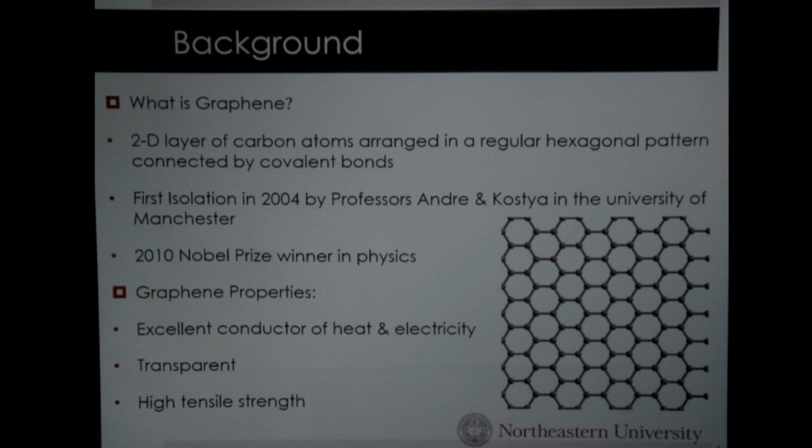Graphene has many unique properties. One of these is that it's an excellent conductor of heat and electricity. It is almost transparent, and it has the highest tensile strength of any material that exists today.

There are many ways to produce graphene. One of these ways is chemical vapor deposition, which we used in our process. Also, there's exfoliation and hydrothermal self-assembly.

Graphene has attracted many industries due to its broad applications, such as touch screens and transistors, conductive coatings and ink, and solar cells.

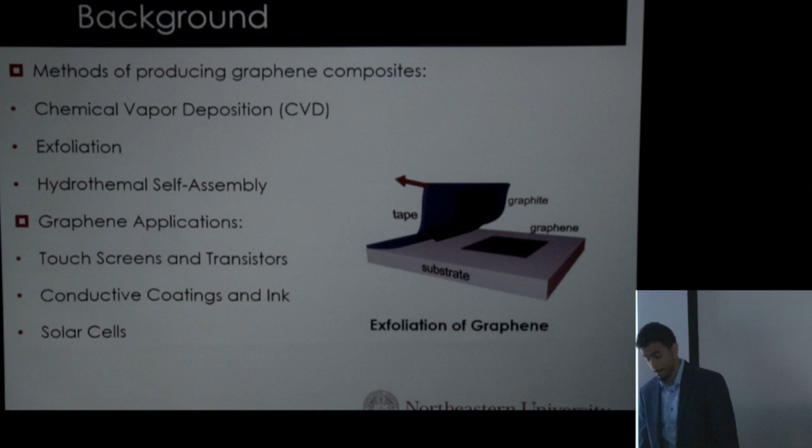For this project, we had three main objectives. Number one is to scale up graphene silicon dioxide composite using a novel continuous CVD process to produce touch screens. Number two is to make graphene more accessible for commercial and industrial applications. And number three is to lower the cost of producing graphene while maintaining the high quality of the graphene layer.

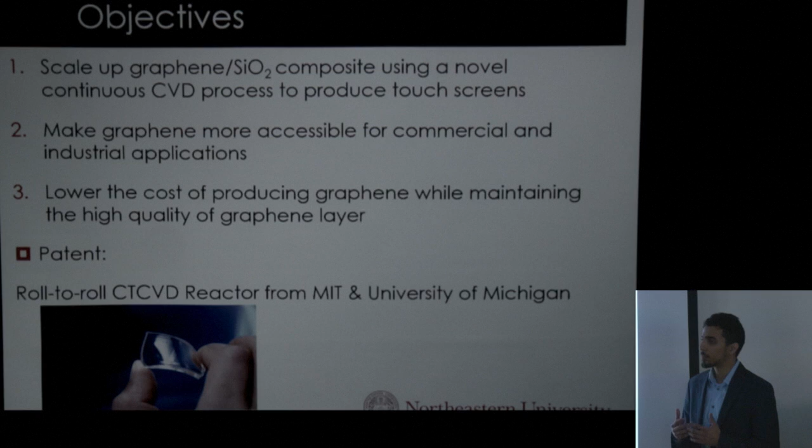In order to achieve our goals, we used a roll-to-roll concentric tube CVD reactor, a patent that was developed by researchers from MIT and University of Michigan.

The graphene market is projected to reach 149.1 million in 2020 with a 44% annual growth rate, as there is a new kind of demand for graphene every day.

The global transparent conductive screen market is expecting huge demand, with key providers such as Samsung, 3M, and Corning heading toward more graphene-based touchscreen technology.

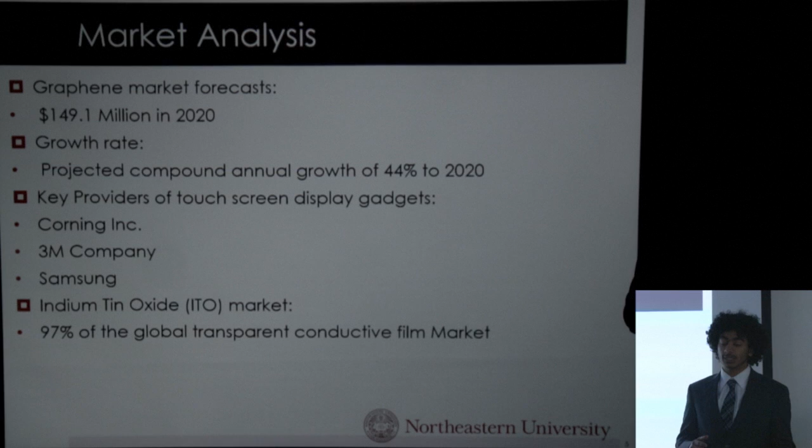Indeed, indium tin oxide holds 97% of the global transparent film market, and graphene is proven to be superior to indium tin oxide in its conductive properties.

Samsung showed huge interest in graphene as they filed a number of graphene-related patents, and they need around 7.8 billion centimeters squared to equip only 30% of their annually produced 336 million devices.

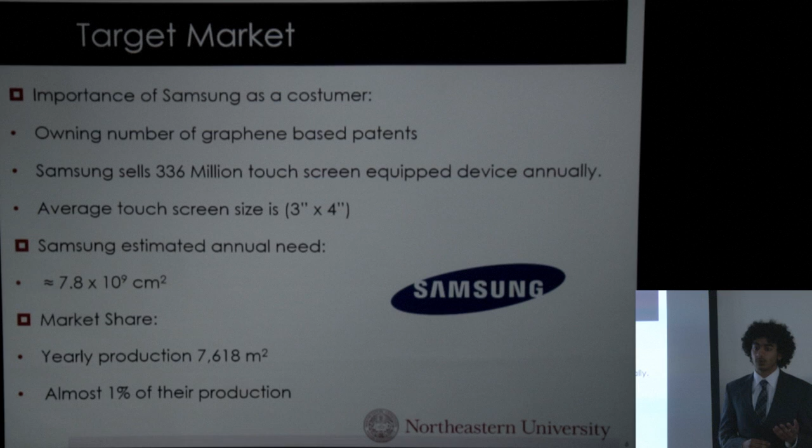We will be able to cover 1% of that through our production rate.

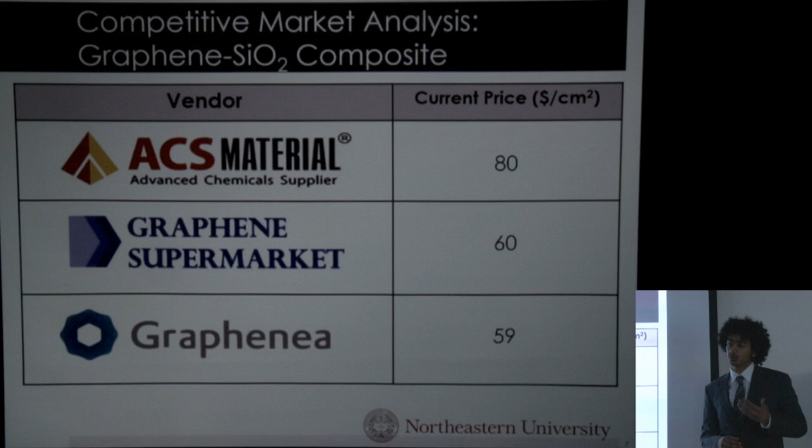It is also important to notice that current prices for graphene are around $60 to $80, as provided by Graphenea and other companies such as ACS Materials, and that's a lower product quality than the one produced by our process. Our price was around $0.2 per centimeter squared, which is a competitive price to that of ITO at $0.187.

We will show you in the next couple of slides how we were able to get to that price.

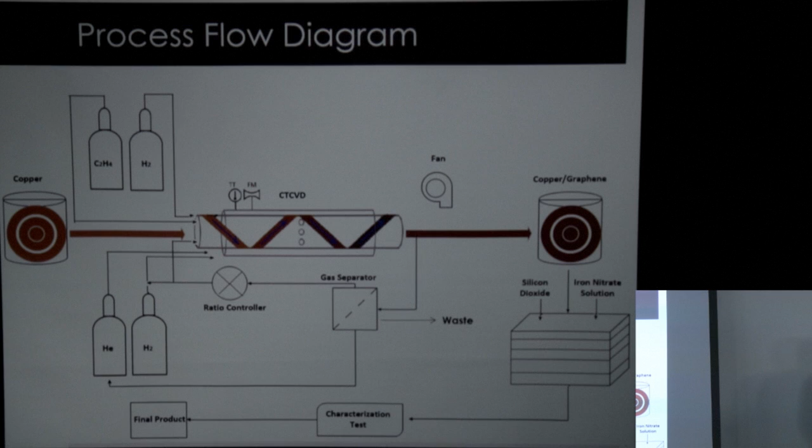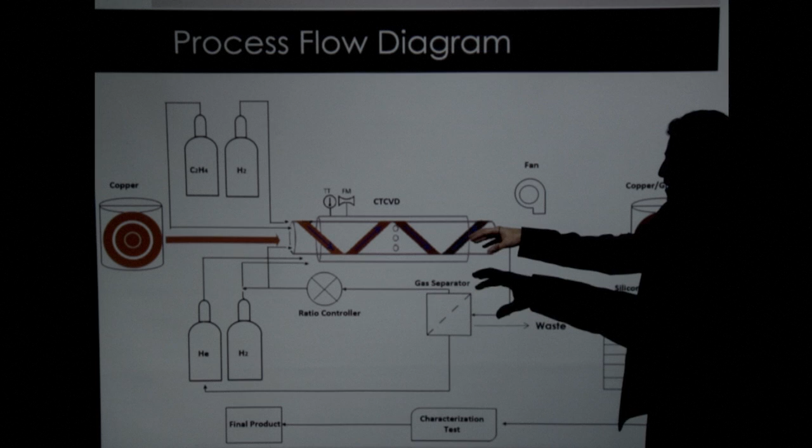Here's a process flow diagram of our system. The copper foil is wrapped around the inner tube of the CVD reactor, and ethylene and hydrogen gases enter the system, and in the presence of high temperature, the graphene layer forms on the copper.

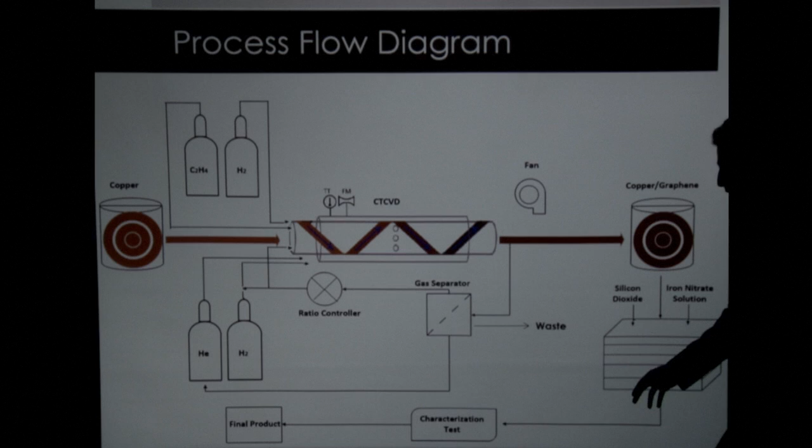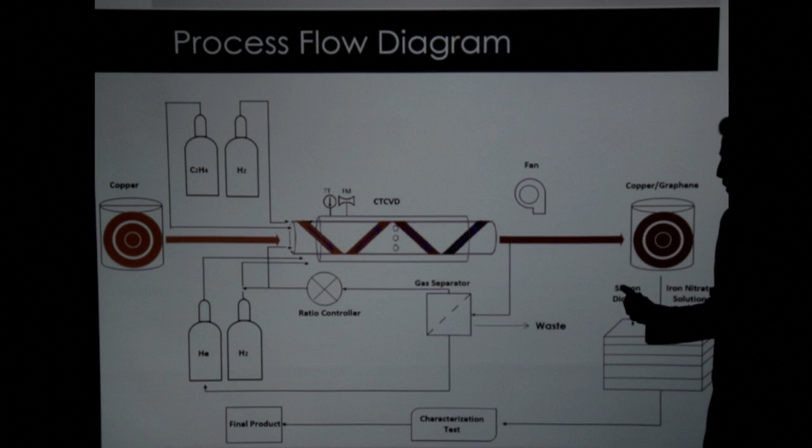Then the copper graphene layer goes to a transfer step where the graphene transfers from the copper foil to a silicon dioxide substrate. After that, the product goes through a couple of characterization tests, and if it passes, then we get our final product. Also, we added a recycle stream to our process to recycle the unused gas, which Faris is going to talk about in more detail.

And here's the design of our CTCVD reactor. The uniqueness and significance of this design centers around the concentric tube.

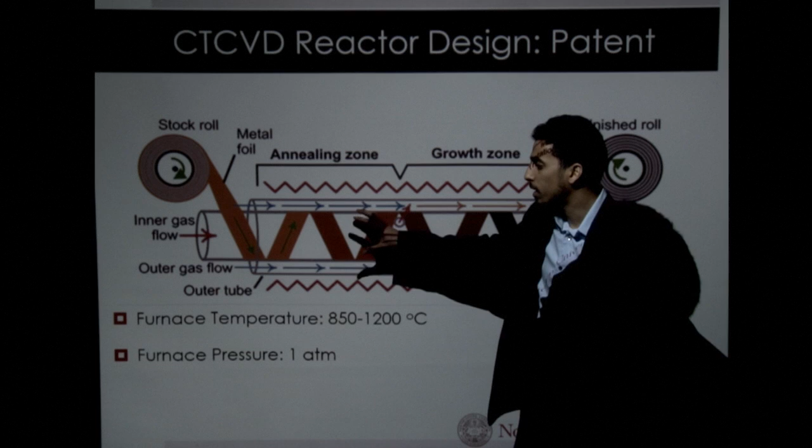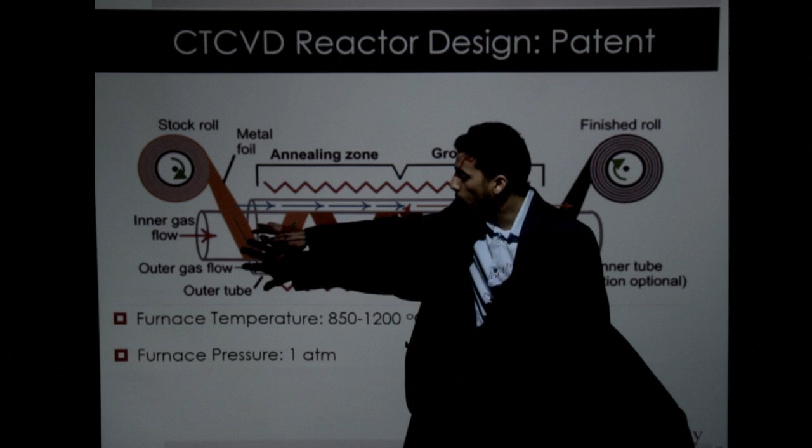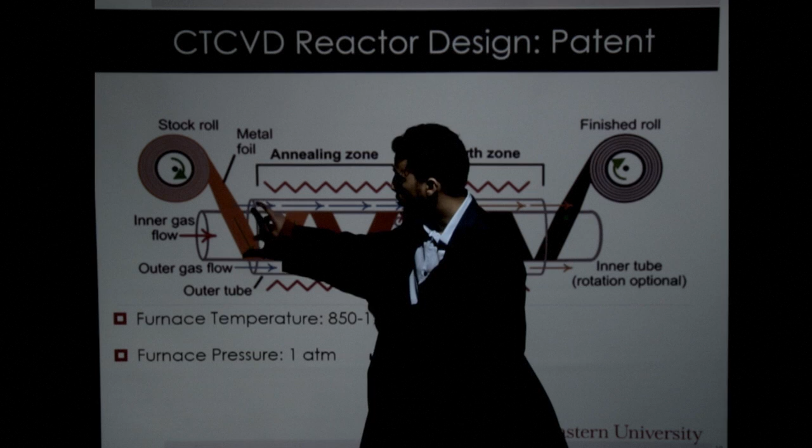By adding an inner tube to the existing tube, they were able to reduce the amount of gas used by 90%. So basically, you can either enter the whole volume of gas to your system, or reduce it by adding the inner tube, giving you a smaller, confined volume between the inner and outer tube.

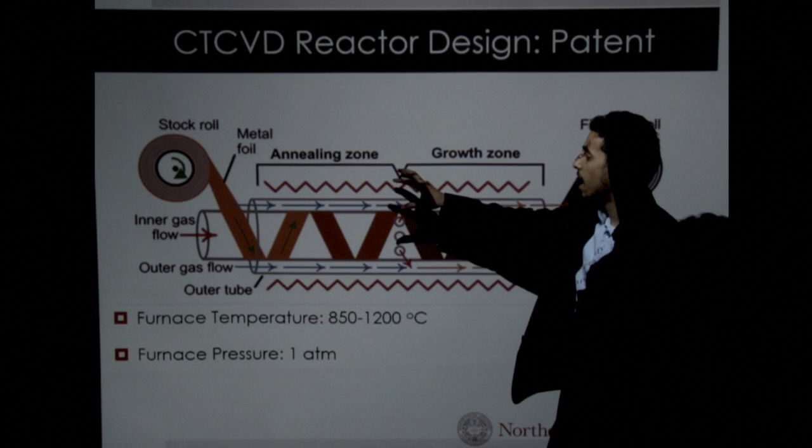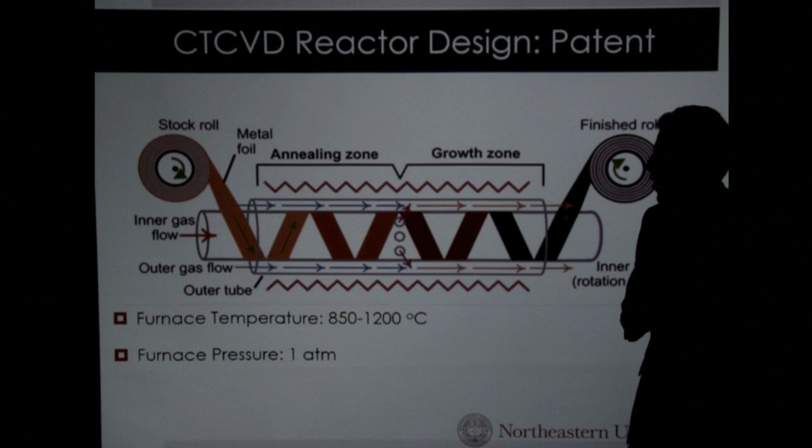Also, in this reactor, we have two zones: the annealing zone and the growth zone, which I'm going to talk about in the next slide. Another unique feature of this process is that it operates at atmospheric pressure, which is different from other processes that operate at lower pressure.

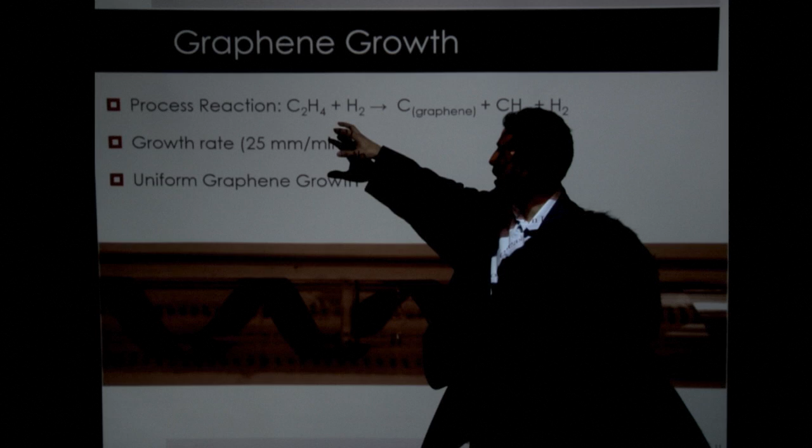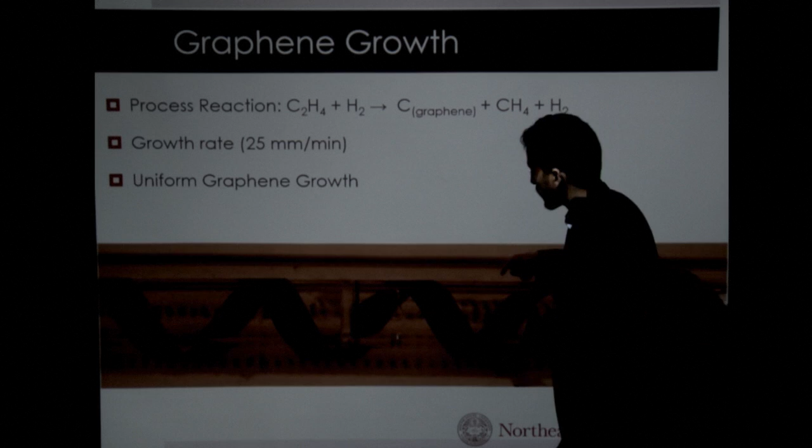This is the reaction that takes place in the CVD reactor: ethylene reacts with hydrogen to get graphene, methane gas, and hydrogen. The growth rate of this graphene layer forming on the copper foil was found to be 25 millimeters per minute, and this growth rate was found to be the optimal growth rate for uniform graphene.

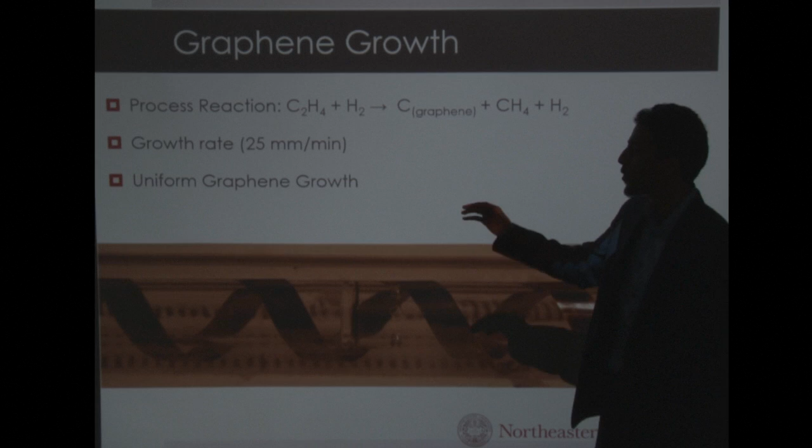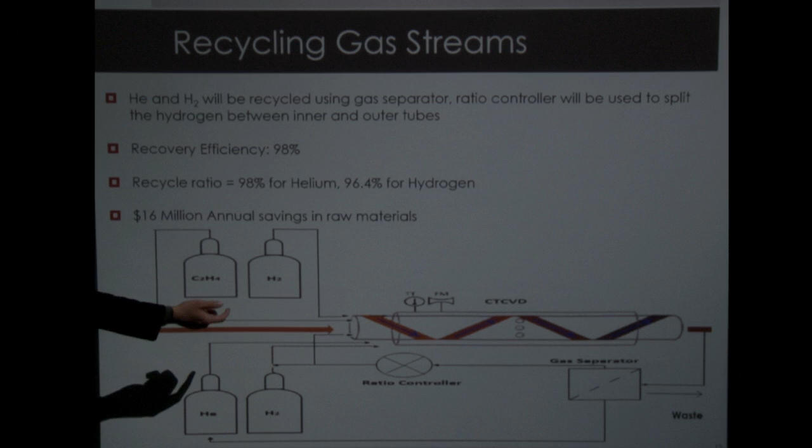As mentioned previously, we'll be recycling some of the gases. The unconsumed helium and hydrogen will be recycled after leaving the reactor, and as it goes to the gas separator, the helium will be pushed back to the inlet, while the hydrogen will leave the gas separator from the top stream. The hydrogen then moves into the ratio control, which splits it into two streams: the first stream, consisting of 55% of the hydrogen, goes into the inner tube of the CVD reactor, while the remaining 45% moves to the outer tube.

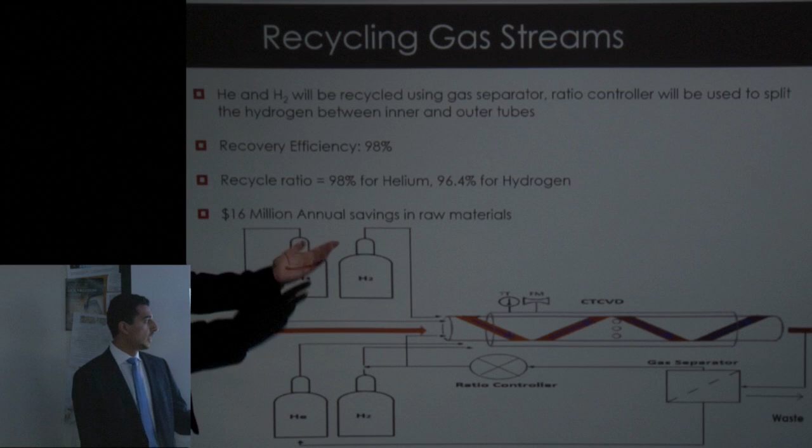The recovery efficiency of our process is estimated to be 98%. The recycle ratio is 98% for helium, since helium is introduced as an inert and isn't consumed in the process. For hydrogen, the recycle ratio is 96.4%, with 3.6% consumed within the reactor. We're estimating to save $16 million annually on raw materials with this recycling.

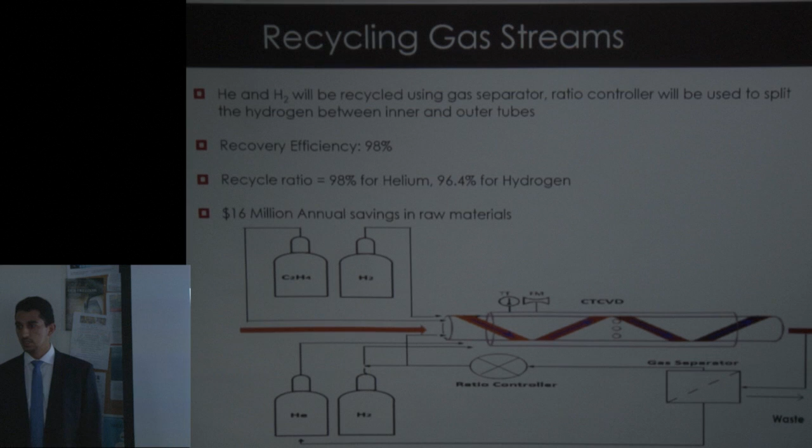In order to meet our target production, we decided to go with three CVD machines, achieving a production rate of 7.7 square meters per day. To reach that, we focused on three main criteria for scaling up. The first was reactor design—we picked out a specific reactor from Thermal Product Solutions with specific dimensions and performance specifications.

The second criteria was the inlet fluids and raw materials. For the gases used, such as helium and hydrogen, we had to scale them up using Reynolds number. The final criteria was the output dimensions—the dimensions of the copper substrate leaving the reactor. It leaves the system at a rate of 25 millimeters per minute, with an estimated thickness of 51 micrometers, while the width is almost 9 inches.

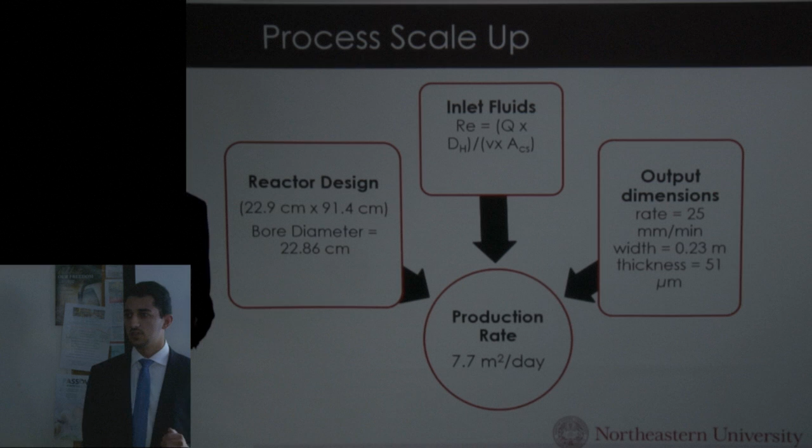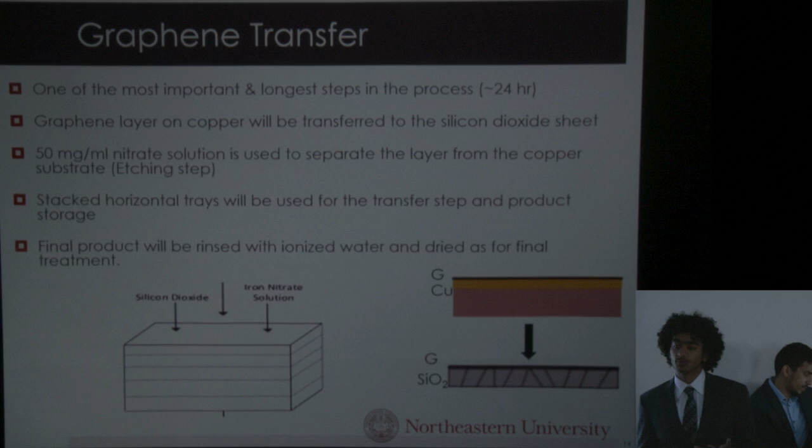After the graphene on copper layer leaves the reaction furnace, it needs to be transferred to an SiO2 layer to be used in touch screens. This is the longest part of our process. The idea is simple: we place the graphene on copper layer in a 50 milligram per milliliter iron nitrate solution and wait for the graphene layer to be etched to the surface. After carefully removing the copper layer, we place an SiO2 layer for the graphene to be deposited on it. We were able to speed up that process by using stacked trays of iron nitrate solution, which saved space and time and helped us reach our production rate of 76 million centimeters squared yearly.

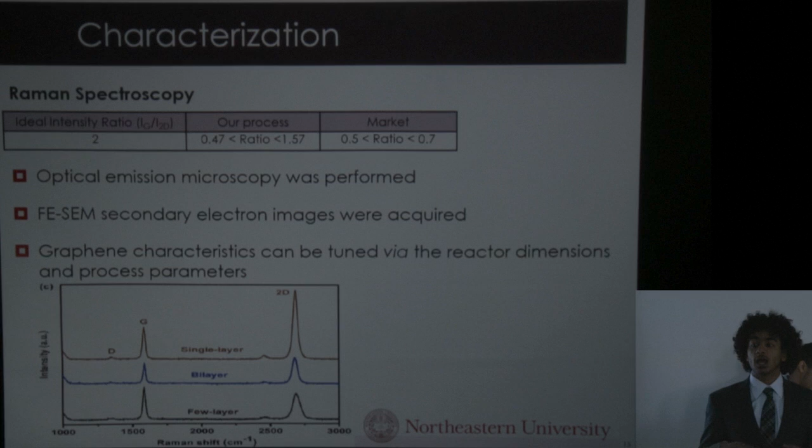A perfectly deposited graphene layer consists of a number of carbon atoms, each connected to 3 other carbon atoms. This structure allows the 4th valence electron of carbon to be available for conduction, and it showed an ideal Ig to I2D ratio of 2. Through our process, we achieved an Ig to I2D ratio of 1.57, whereas current products in the market have a ratio of 0.7. We also used FESEM secondary electron imaging to ensure a better quality product.

In the tube furnace, there's a range of temperatures available from 800 to 1200 degrees Celsius. However, for our optimal reaction conditions, it's better to have it around 1000 to 1010 degrees Celsius. To regulate the temperature, we have a temperature controller managed by a feedback controller containing a thermal controller and a temperature transmitter. Once we set the temperature at 1010 degrees Celsius, if the furnace temperature goes above the set point, the valve closes so the temperature comes back down. If the temperature goes below the set point, the valve opens to heat up the system and bring it back to the set point.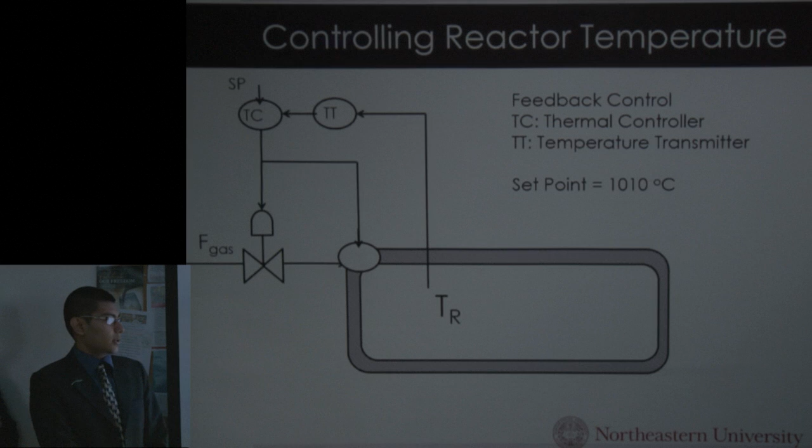Next, we have the substrate selection. So, like we mentioned before, we introduced copper into the tube furnace in order to form graphene on it. However, we had choices to choose between substrate materials. Some of them were copper, nickel, and aluminum. Among them, we chose copper because copper was less expensive than the other available materials.

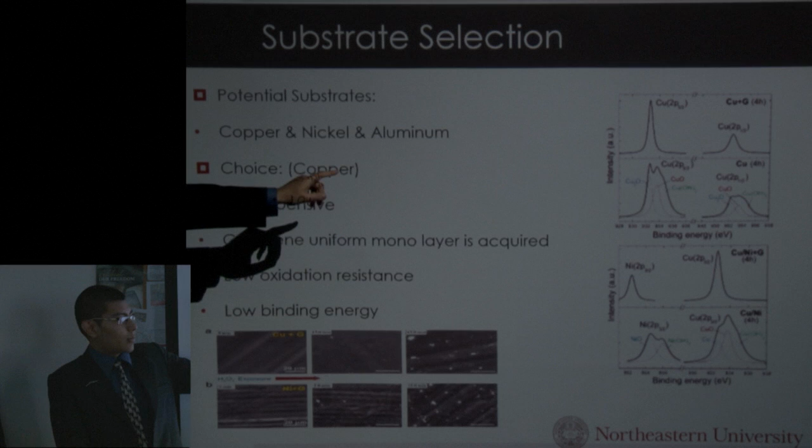Over there, we have data of binding energy. The top one is of copper graphene and the bottom one is of nickel graphene. The binding energy of copper graphene is comparatively lower than the nickel graphene, so it's easier to extract graphene from copper rather than nickel, and easy to process to make it into silicon dioxide and graphene.

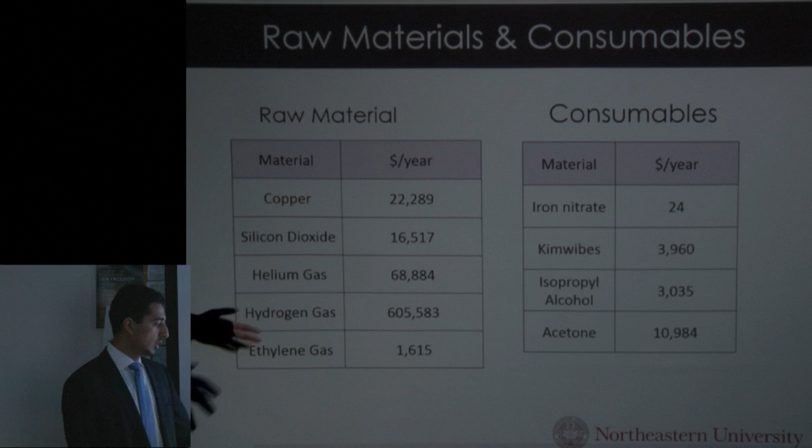So for raw materials and consumables, first on the list is copper, which is the substrate I've just talked about. Silicon dioxide, which will be in our final product. Additionally, we have the gases entering our system. Most of the costs were consumed by helium and hydrogen, especially hydrogen, as it costs around $600,000, since our process must be overflown with excess hydrogen.

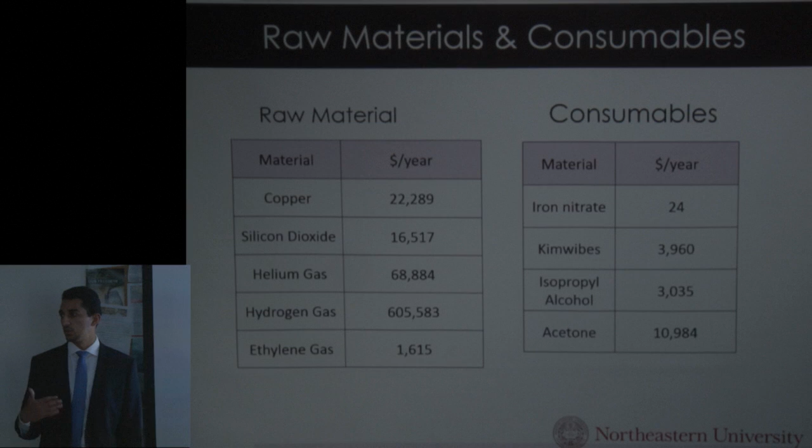For the consumables, iron nitrate will be used in the graphene transfer procedure, and Kimwipes, acetone, and isopropyl alcohol will all be used in the treatment of copper prior to entering the CVD reactor.

So for our major equipment, here's a quick list. First is the tube furnace, which is the CVD reactor. We're using single zone heating, which reaches up to 1200 degrees Celsius. Its cost is around $14,000. We have the gas separator. You could see it took a lot in terms of our installed capital cost. After we had done our calculations, the gas separator proved to be beneficial, and economically beneficial as well.

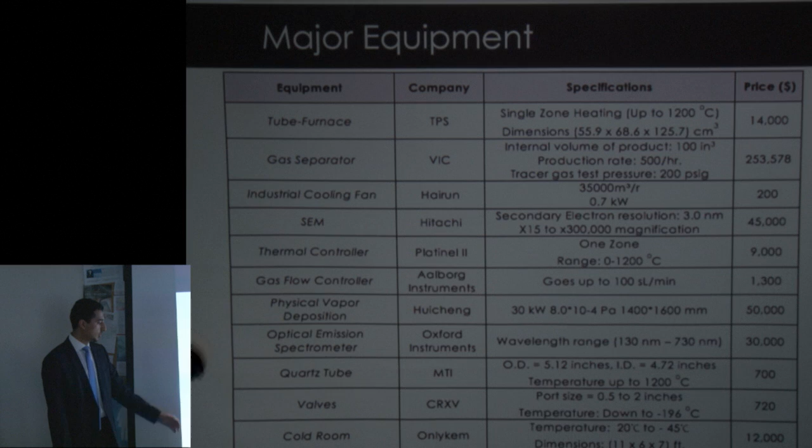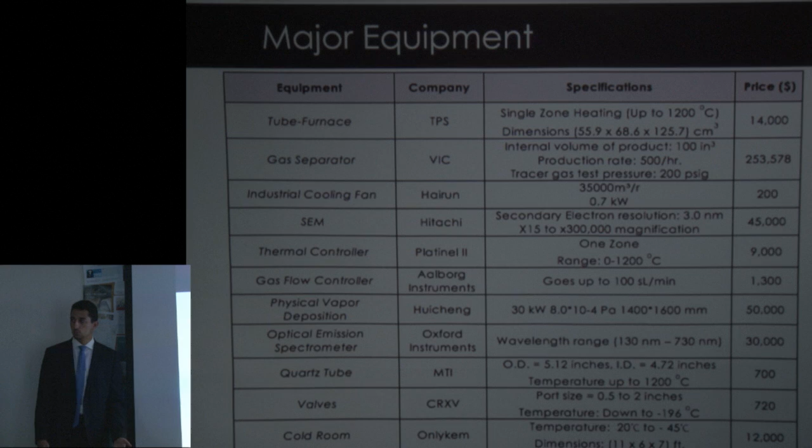So the SEM and optical emission spectrometer will both be used for the characterization of our final product. We have used a couple of controllers as well for the gas flow and temperature. We're using a physical vapor deposition machine, which will do the electron beam evaporation on the copper substrate for coating. We're using a quartz tube, so it sustains the heat of our CVD reactor. And finally, we're using a cold room to store our gas cylinders of hydrogen and helium.

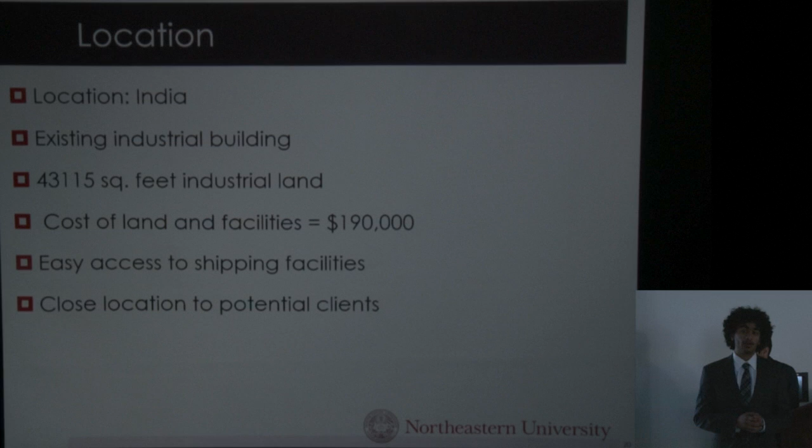Our plant will be located in India, as it will allow us to produce at a price competitive to that of ITO, especially since we have found a ready-to-use industrial facility with easy access to shipping facilities for $190,000.

Since we are running our plant for 24 hours, regular maintenance of tools is required. Any problems in our equipment can cause our production process to delay, which we do not want. Hence, the technicians will perform regular checks and safety checks. Finally, our process might have some alterations depending on the temperature and changes in the reaction. To monitor the constant reaction rates, we have decided to hire 3 engineers.

And finally, we have 1 manager to supervise all of the employees and look after the plant. So our total expenditure on workers is around $420,000, which includes 25% tax plus insurance according to the government regulations in India.

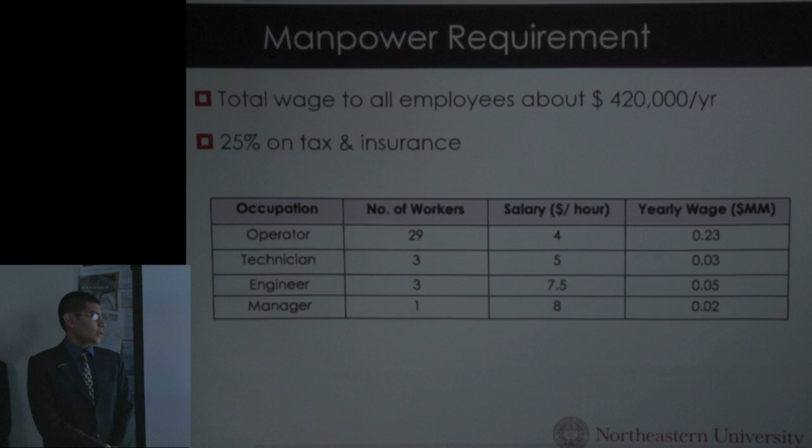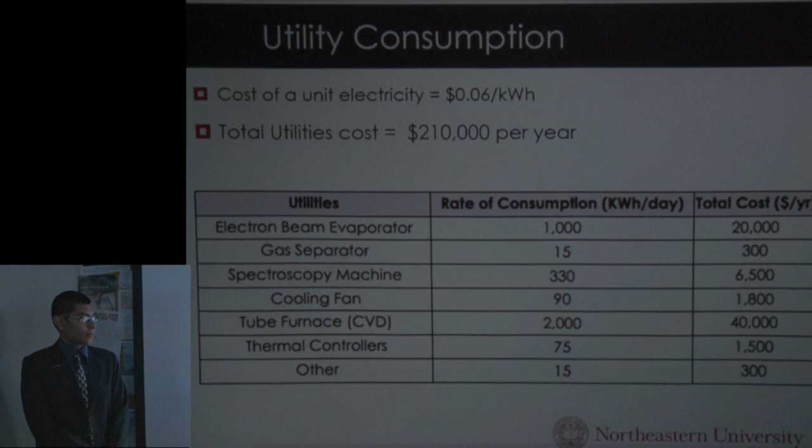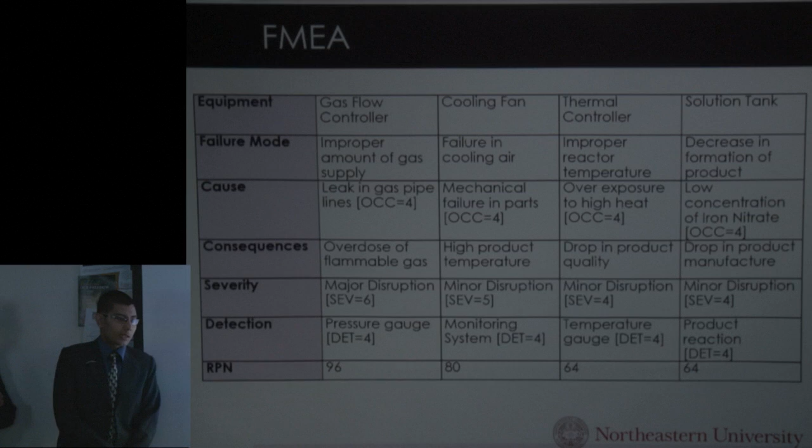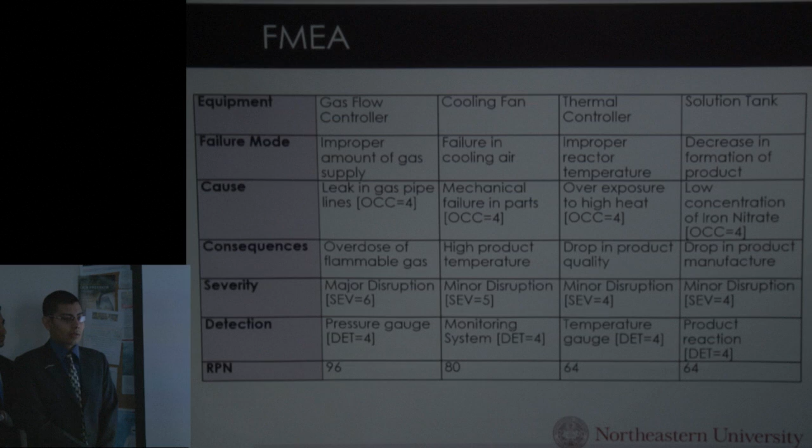Next is the thermal controller. Like I mentioned before, there's a set temperature range that the tube furnace can obtain. If the temperature goes above the required temperature, then again the process is hampered and our product quality decreases. Finally, there's the solution tank where iron nitrate solution and silicon dioxide is present. The concentration required to react silicon dioxide with graphene, if not met with the right quantity, then the reaction and product quality can decrease.

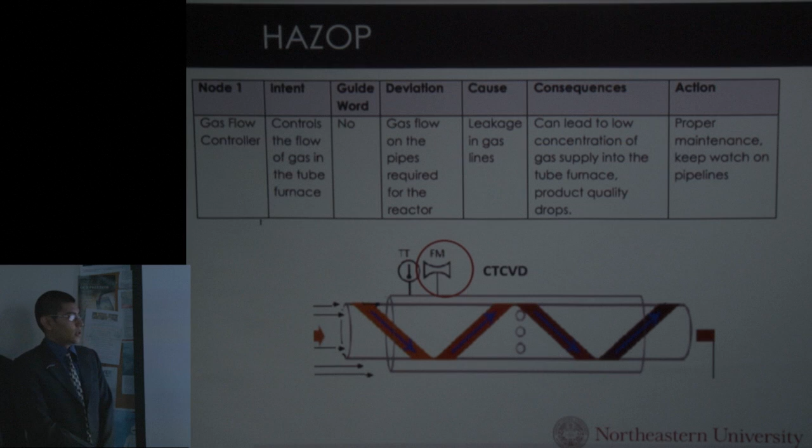And again, based on our process, we discovered two hazardous nodes. The first one is again the gas flow controller. Like I said before, if there are leaks in the pipelines, then improper gas supply concentration goes into the tube furnace. Leaks of gas can cause severe consequences, and the technicians are responsible to make sure this does not occur. Hence, proper maintenance and watch on pipelines is necessary.

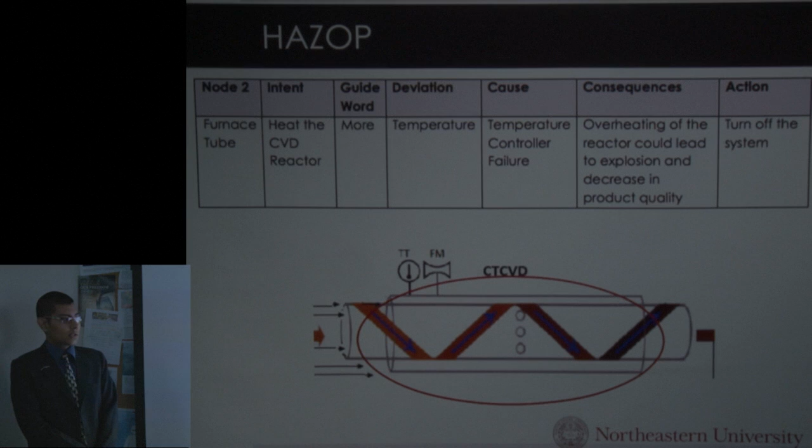The next node is the tube furnace. Like I mentioned before, there are various ranges of temperatures possible in the tube furnace. Especially we're dealing with flammable gases such as hydrogen and ethylene going into the furnace. Improper temperature range can cause flames to occur in the tube furnace. And in order to avoid such possible scenarios, it's better to have an emergency turn-off system in case the temperature exceeds the limit.

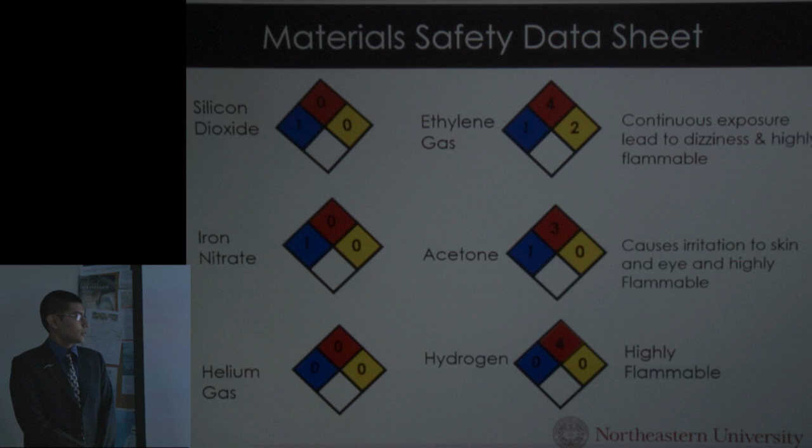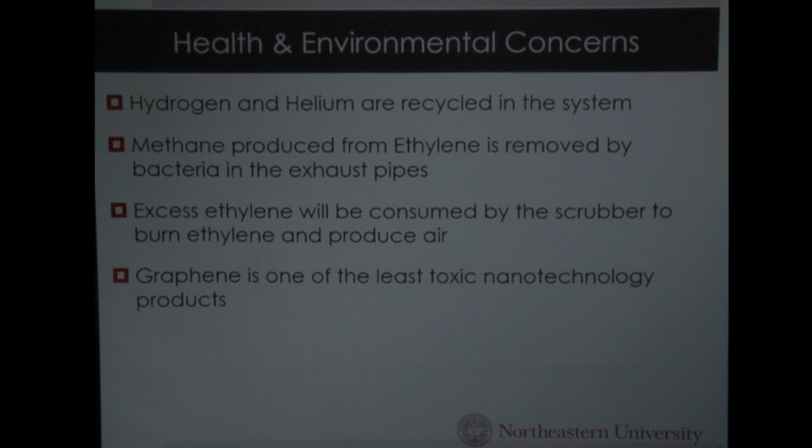We ask ourselves what effect graphene can have on the environment or the end user. We recycled the hydrogen and helium in our system, and the methane produced from ethylene was removed by bacteria in the exhaust pipes. Also, the excess ethylene will be consumed by the ethylene scrubber to burn ethylene and produce air. So these are three solutions to make graphene composite more friendly to the environment. Besides that, graphene is one of the least toxic nanotechnology products.

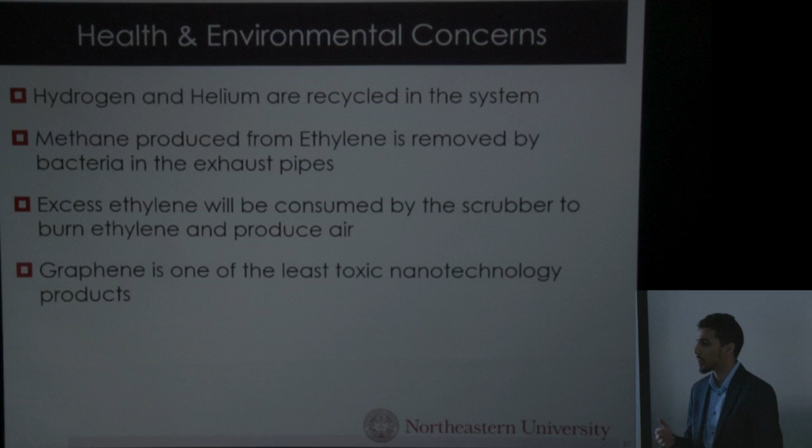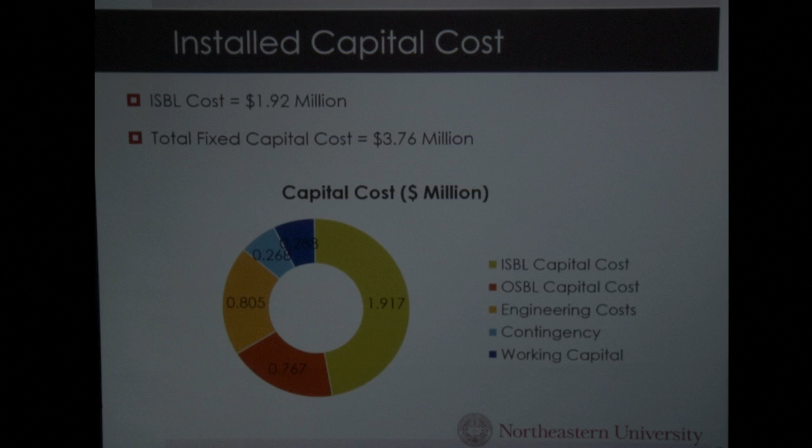So for the capital cost, initially we calculated the ISBL cost through the summation of the equipment required for our process, in addition to the cost of the plant and facilities and the cost of the clean room. From that value, we were able to calculate the following OSBL and the other costs incurred. The total cost was estimated to be around $3.76 million. We're spending around $800,000 on engineering costs for engineering and procurement.

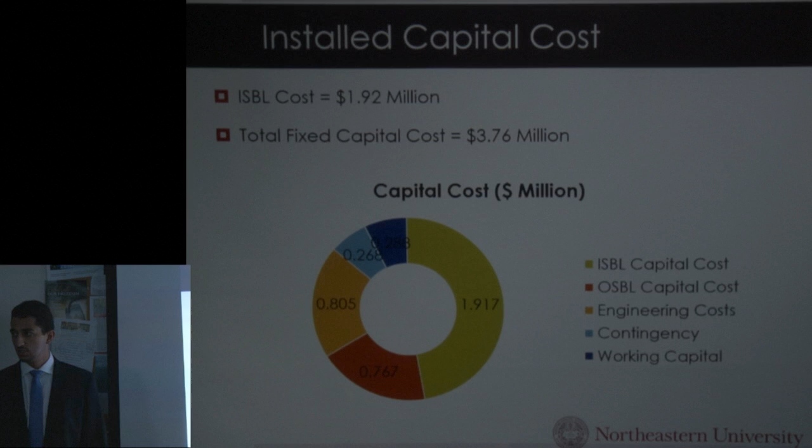So our cash cost of production was estimated to be $2 million, with 2.64 for the cost of production, including the annual charges with a tax rate of 15%. Our revenue is estimated to be $15,240,000 with the price point of $0.2 per centimeter squared. Our gross profit is estimated to be around $13 million. The fixed cost was fairly high for chemical engineering processes, given that our process is more of a labor-intensive process.

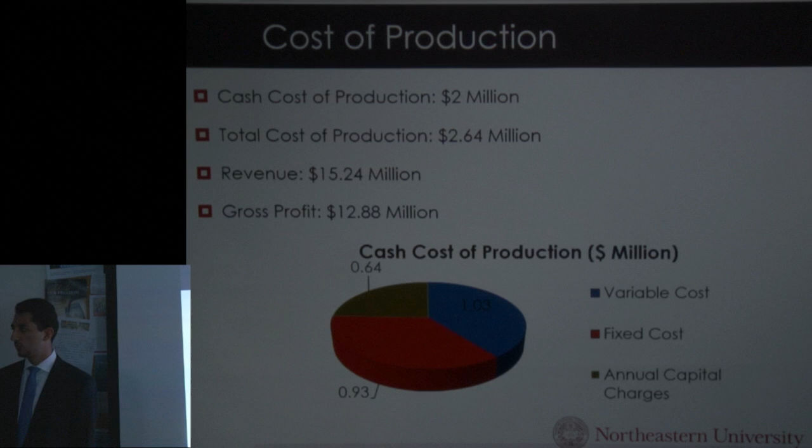So for the project feasibility, it is estimated that we'll be able to pay back our investment in 4 months and 15 days. Our return on investment is almost 300%. For the depreciation method, we have used straight line depreciation. Our cost of capital was estimated to be 25%, given our investment is considered moderately risky. The corporate tax in India is 15%.

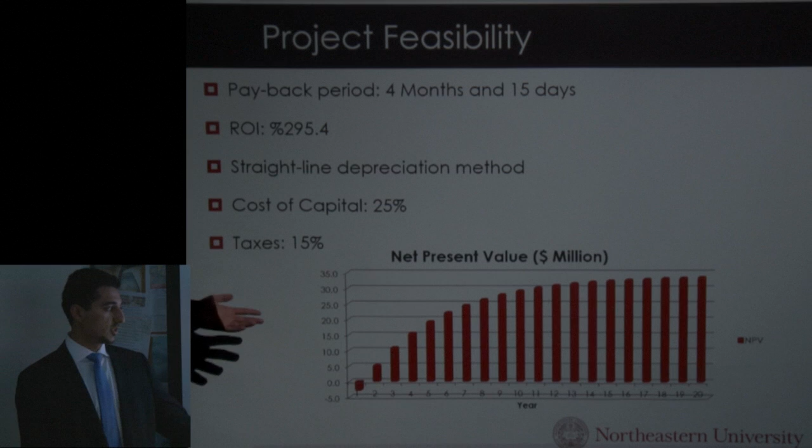In the graph below, you can see the net present value of our company in the first year. Basically, that's when we incurred the capital cost, and down to 20 years, our net present value will be around almost $30 million.

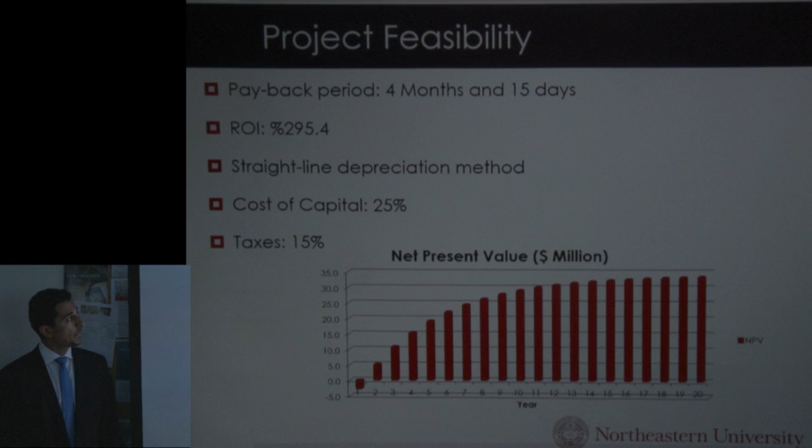So at the end, what significance would our project have? First, we have the environmental impact. Graphene is 100% recyclable. Graphene will help us reduce the energy consumption, as there has been research on using graphene for solar cells within mobiles. Additionally, we'll be able to substitute the rare metals, as Abdullah said. ITO consumes a lot of indium, and indium is a rare metal nowadays. So graphene will be used to replace that.

For business impact, the most obvious one is higher sales for companies as their products develop and progress. More people will be inclined to buy them. Additionally, graphene will help push back the previous limitations and drawbacks of certain technologies, given the features it has. So further innovation and development of products. For individual impact, with graphene, people will be able to charge their phone way faster. And there have been some developments in the mobile healthcare industry using graphene touchscreens.

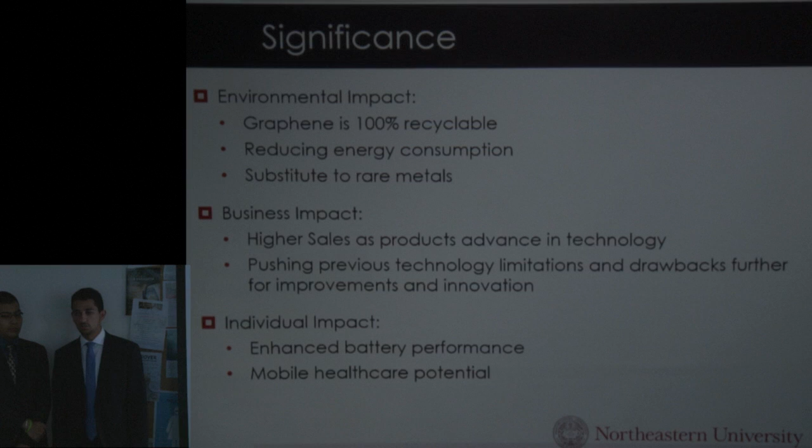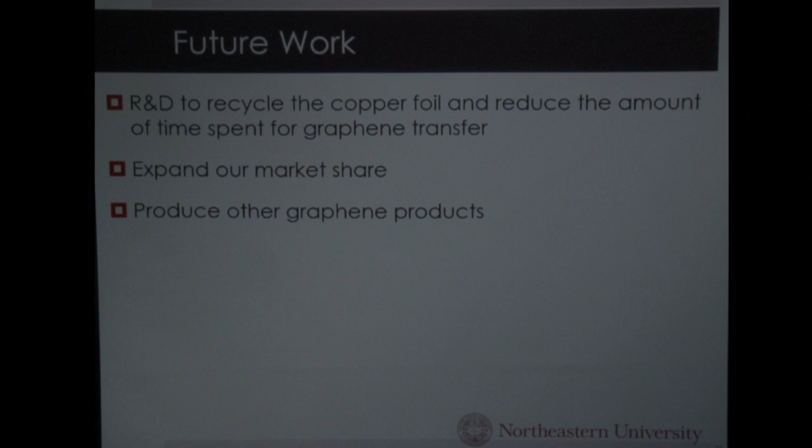So for future work, we're planning to spend more money on R&D to recycle the copper foil that was used in the system, and also reduce the amount of time spent for graphene transfer, since it takes about 24 hours. Also, we're planning to expand our market share and produce other graphene products.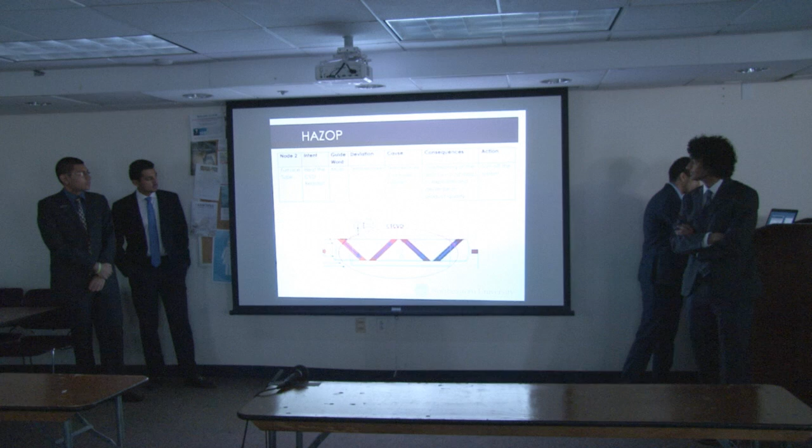Can you go back to the copper transfer slide? We were talking about transferring graphene onto silicon oxide. Yes. This was also from the guys at MIT? Yeah, it was from the guys at MIT. Just the design of this tank was. How thick of a graphene film are you expecting to grow on copper? It's in nanometers. I think it's 1.58 nanometers. It's really thin.

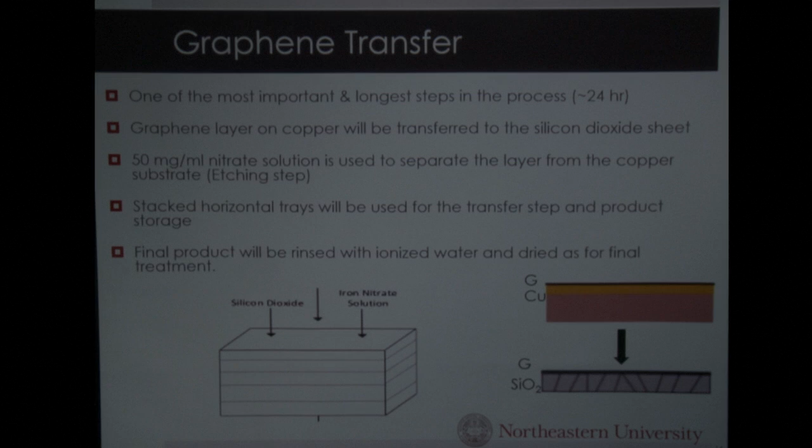And they show that you can get a good uniform transfer? Yeah. Basically, we'll use SEM testing to perfect it. Usually in terms of processes, the average was around 90% to 95%. We estimated that we'll be able to have 93.5%. And if you use the specification in the design, at 25 millimeters per minute, it was proved that it's going to give you a uniform graphene layer, even on the copper. Also, the product quality is usually characterized by the I2D to IG ratio, and through this process, we're able to get a good I2D to IG ratio.

Well, if you're getting a 25 millimeter per minute growth rate, then you have to be doing that for a fraction of a second to get nanometers. Yeah, it should take a small amount of time to be produced. And is that etching solution going to be compatible with a cell phone? Because you're going to have all the other electronics on there, and then you're going to transfer. It's going to be rinsed and cleaned after.

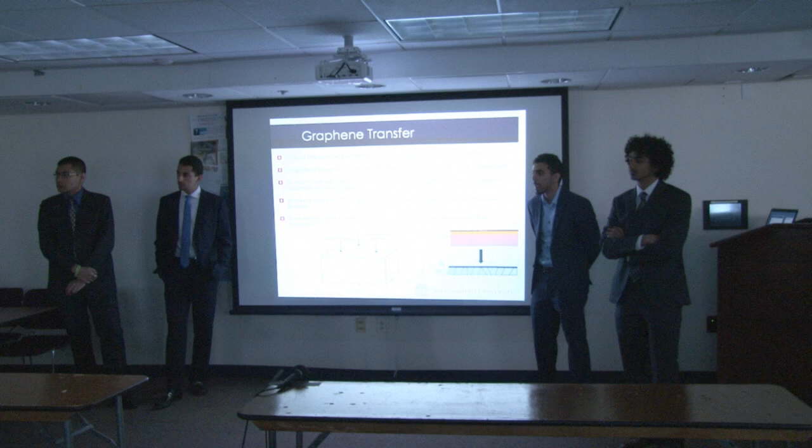I have a related question. At the end, you said a possible future improvement is to recycle the copper foil. Can you tell us something about the problems that need to be solved in order to do that? Because we're not sure how the waste in the foil, after we remove the graphene, is going to be removed, to reuse 100% of the copper, and it could affect the quality of the surface if we reuse the copper, and we need to spend more money to see.

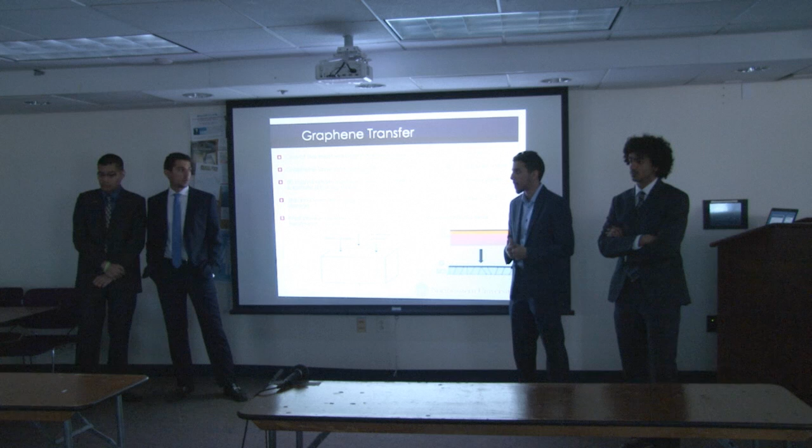We didn't look at that until the end of our project, so we want to take that into consideration in the future. Honestly, we just recently considered that, and as Mohammed said, we don't know the implications of what would happen to the copper, and you cannot risk the quality of the product, since quality is the top priority for graphene manufacturers at this point.

I have questions, but are there any others from any students here that are watching? All right.

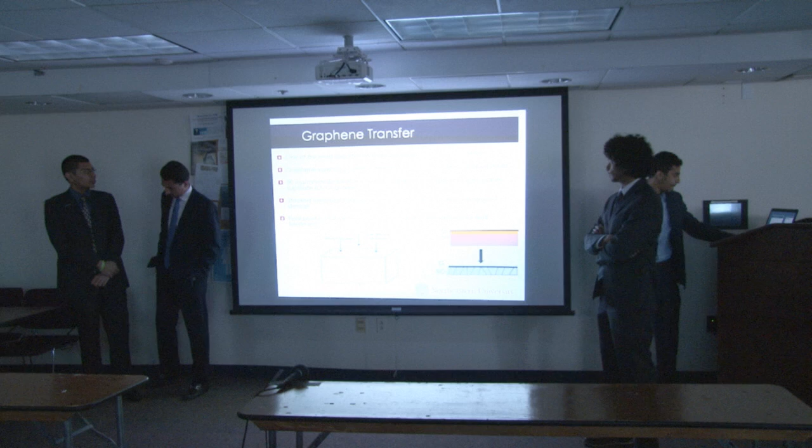One question I heard was about your control system for your oven or your temperature controller. That's on the slide, but I can't see it well from my angle, so stand back a little so I can study it and see if I'm missing something. Right there, back up, that one. So you say when the temperature is low, you would increase flow?

And if your temperature... operate the... what's the F gas? What is the F gas? That's the helium. You have the helium and the hydrogen entering the system.

So if temperature is 990 Celsius, what's the system supposed to do? Can you repeat that? If it's higher than... so if the set point's low, is the valve supposed to open or close?

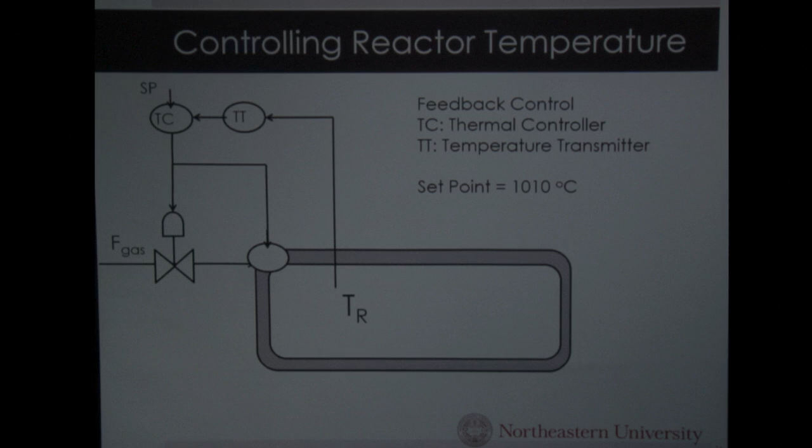No, you can increase that using the control, I mean the machine itself. You can increase the temperature with the machine. And then if it's hot, you would close the system. We would close the valve, so the hydrogen does not go into the system and react.

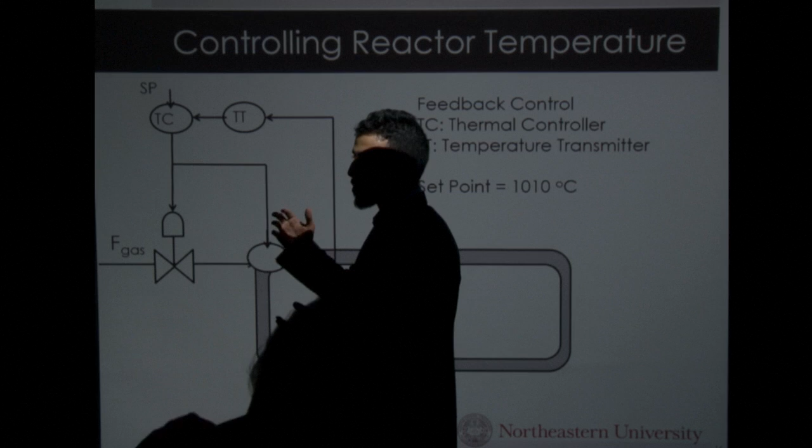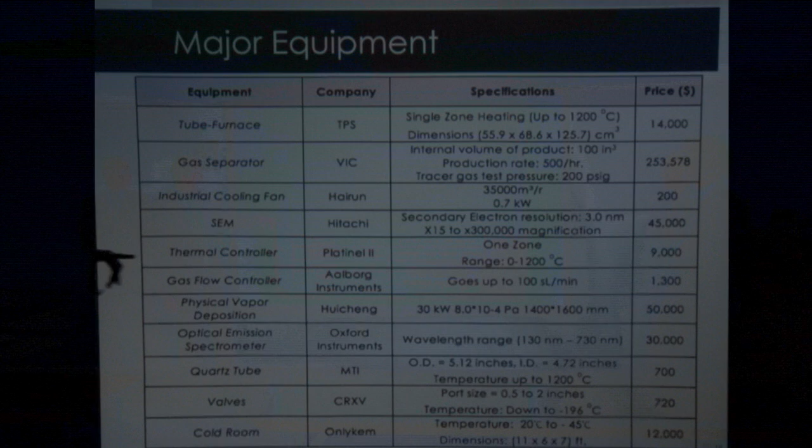Because if you close the valve, you wouldn't have any reaction. Yeah, I mean, if you go to the equipment list, there's the thermal control included. It's used for that specific model of CVD we're using. Basically, the reactor itself has the thermocouple, and from that we'll be able to change the energy going to the CVD reactor or leaving it. Yeah, we have a temperature controller and transmitter setter.

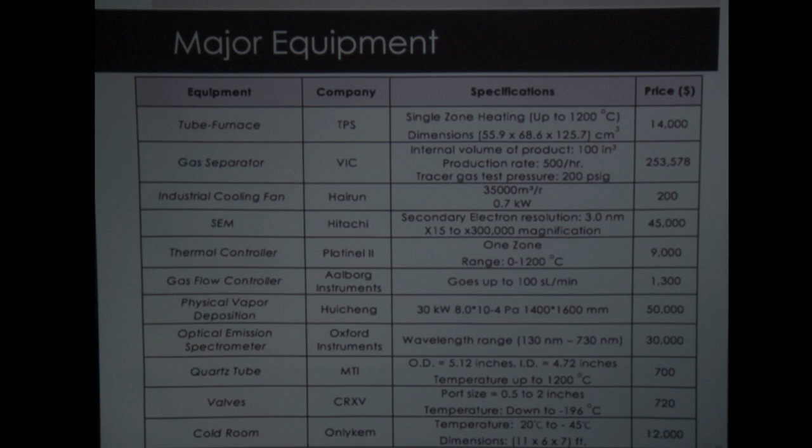Is that your work, or professor's work? No, it's from MIT. Yeah, the patent had spectroscopy, or from the results, the patent or whatever. So it might have been helpful to put that on there as a citation.

Okay, any other questions? So you're going to work in India. One of you must be from India, right? No? None of you are from India? I'm close by, I'm from Nepal. But I was thinking, you know, there's a movie called Back to School, featuring Rodney Dangerfield, and the business professor gets up and talks about all of these things, and then Rodney's laughing, saying you didn't think about having to pay off the waste collector, the union. And in India, I understand, you have to pay off people.

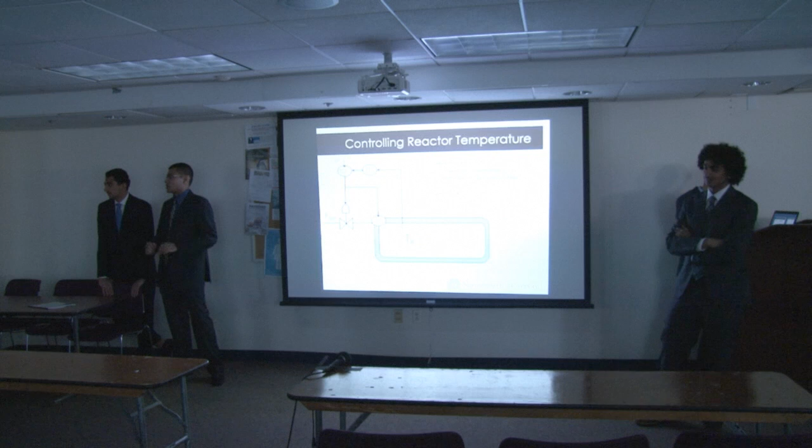I'm just wondering how would you factor that in, and did you put in a number for what's called contingency? Yeah, a little, like in the numbers we put in for our manpower, we basically rounded that off to the nearest million for wages, rather than the thousand.

But on your plant cost, did you have any contingency? Yeah, we had the contingency cost, it was almost 10%, which aligns with... it's gonna have to be around 10, I mean even in the United States, they're... yeah, that's exactly my point. We did it based on the United States contingency cost rather than the Indian contingency cost.

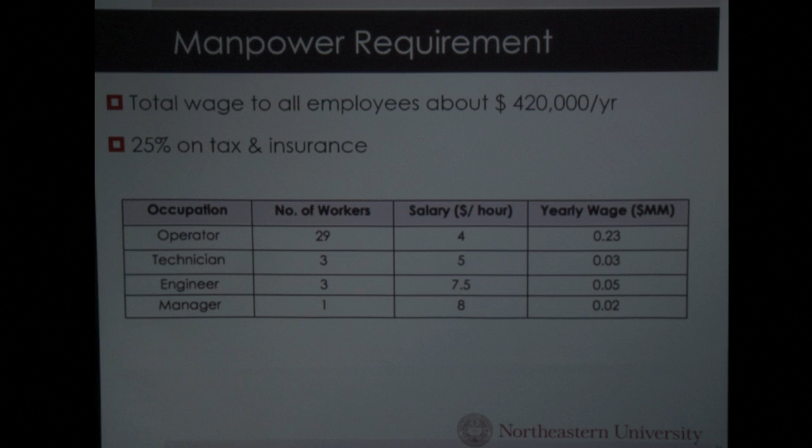That caught my interest when I was listening. Is the salary correct? Yeah, I was planning to say that we're paying them actually more than the average. Labor cost in India is from $2 to $5 an hour. Okay, yeah, operators are usually paid too.

All right, well, you guys may not know this, but I am impressed, really a nice job. Thank you. Thank you. So...